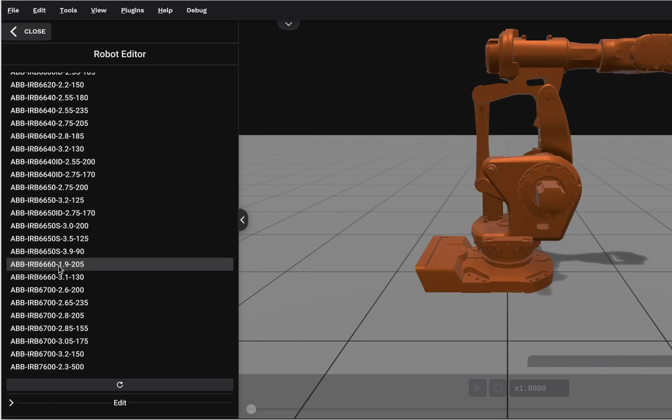In this video, we will demonstrate how to use IRBCAM to machine a large work object. So the first step is to load a robot, and we'll pick the ABB 6660 1.9. And then we load a tool, the spindle TMA4.

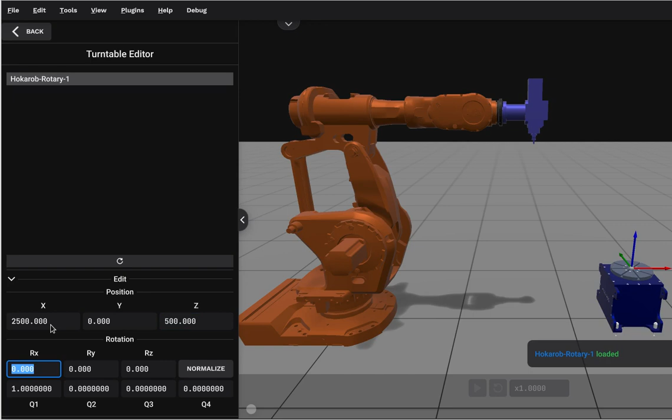And we load a turntable, Hokarob Rotary 1. And I place this at 2500 millimeters and 500 millimeters in Z, like that. Now I will create a large work object, so I go additional objects, cuboid, add,

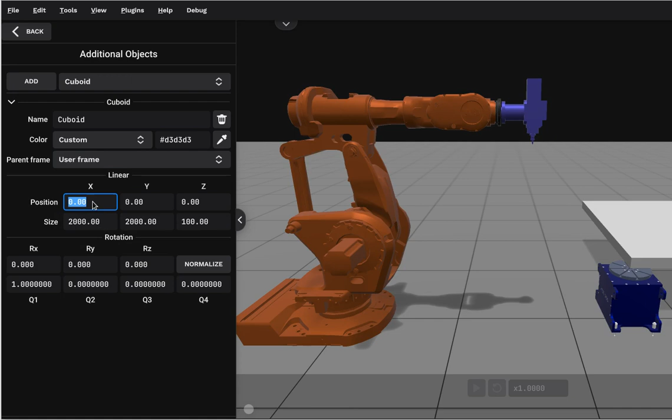and here the size is 2000 millimeters in X, 2000 in Y, and 100 in Z. I place this on the turntable with the user frame, and I want to center it, so we make the position here -1000 in both X and Y.

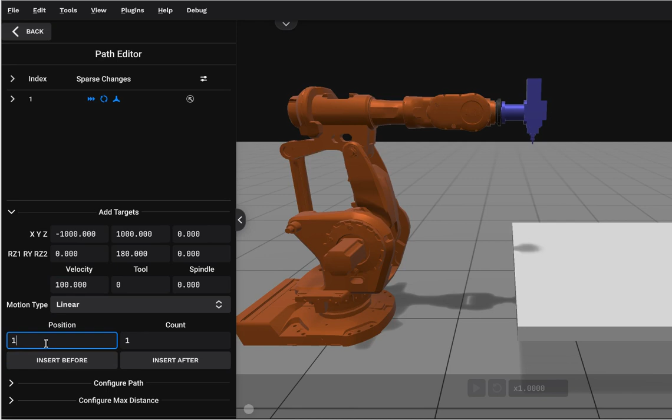Now I want to create targets in each of the corners of this plate. So we go add targets. The first one is at -1000. Velocity 100. Insert. The next one I go -1000. Insert after.

The next one 1000, -1000. Insert. The next one after that is 1000. Insert after. And number 4, no, the fifth one, -1000. So, and I'll also lift each of these targets by 100 millimeters in Z.

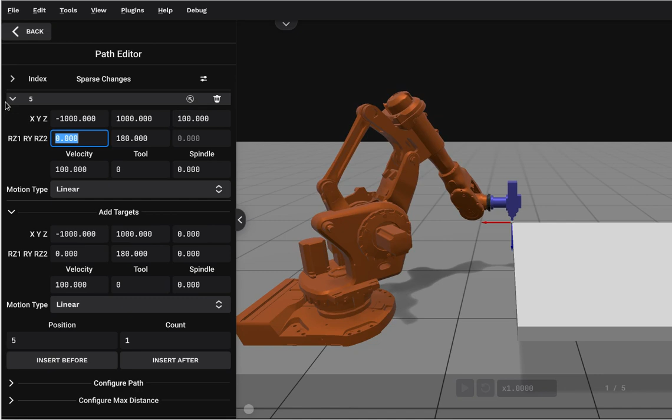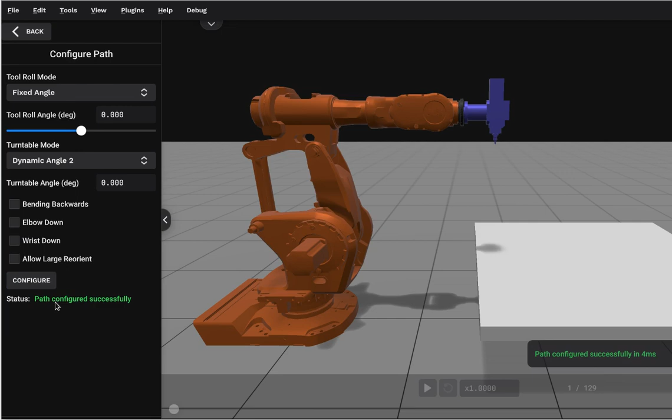In total, 129. So I go back to the station view. Now I can go Tools, Configure Path. Here I will choose the turntable mode number 2, Dynamic Angle 2. Configure. Path configured successfully. Now I can play this.

And you see now that the robot can reach this plate, which is 2 by 2 meters, because the turntable is moving. So Dynamic Angle 2 works very well when you have horizontal work objects, like in this case. This mode here could be used for machining with a spindle, for example, or cutting, for example, with a plasma cutter.

We will let this run to the end, so the last corner is coming up.

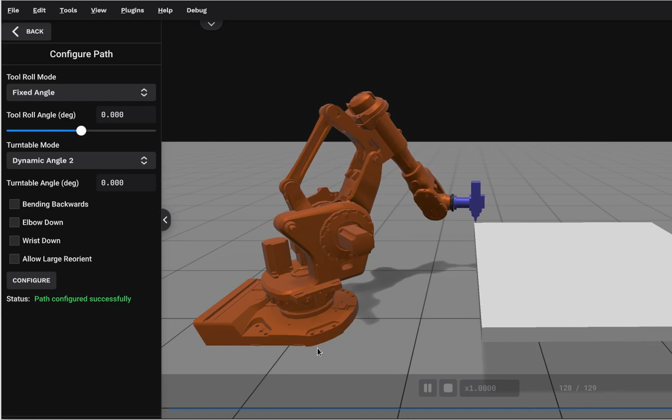The last step now is to go File, Export Robot Code, and here we can generate code which will run on the real ABB controller. So you see, IRBCAM can be used in a few minutes to create quite complex toolpaths, including an industrial robot and a turntable in this case.